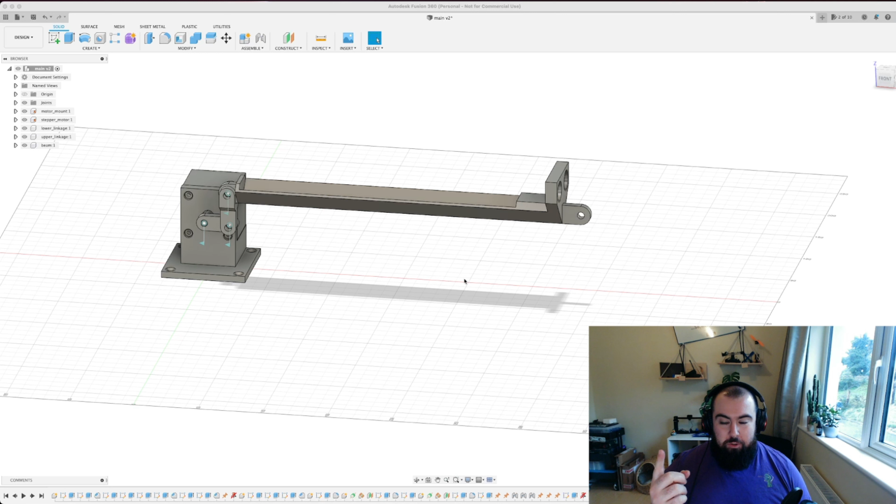I have my model almost finished here, but I have one part left to do, and it's a relatively simple part, but it has some cool little features on it, so I thought this would be a good one to show you guys live.

I might be a bit sporadic with my talking here, because as I actually think about what I'm doing, I may just be silent. If that happens, I'll cut and do editing stuff anyway, but I'll try to make sure as I make decisions and call out things, I'll talk through what I'm doing the whole time.

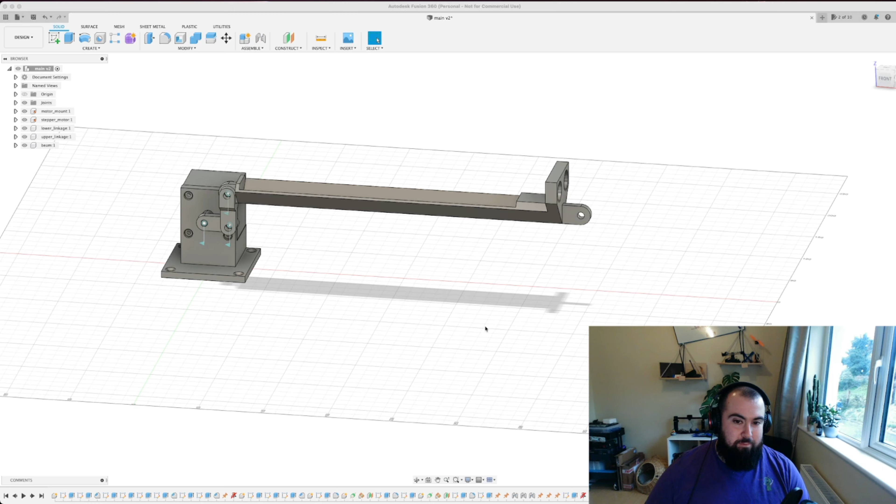Okay, so this is everything I have up to now. The last piece I have to do is the fulcrum piece, which will attach here and be secured. There'll be basically a little clevis here that this goes into, and the pin will go through here in the real life version. Then the body of it will come down and meet some solid base here, and this is the main fulcrum that the whole thing hinges around.

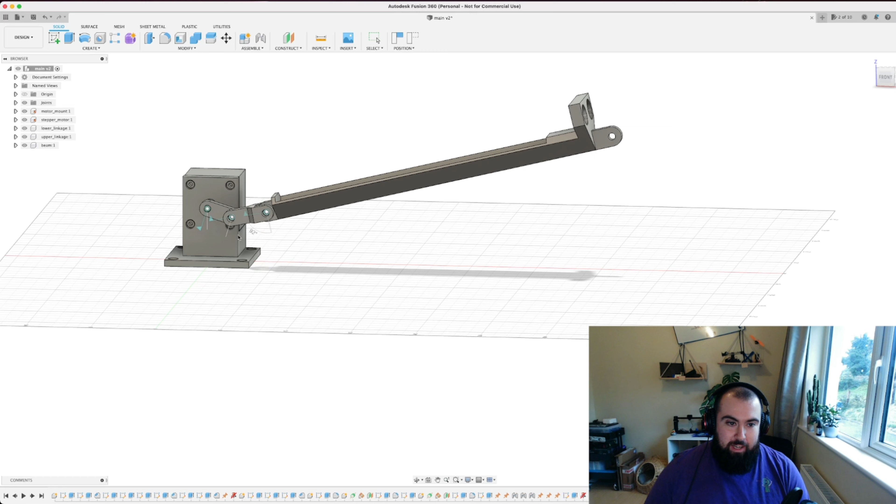So I have some of this done up already with hinges and stuff, so you can see how this will move. It's not really constrained at the moment, so it can be a bit wild and crazy to move around. But once there's a pivot here and this end is fixed, you'll be able to fully simulate all the joints moving around on it.

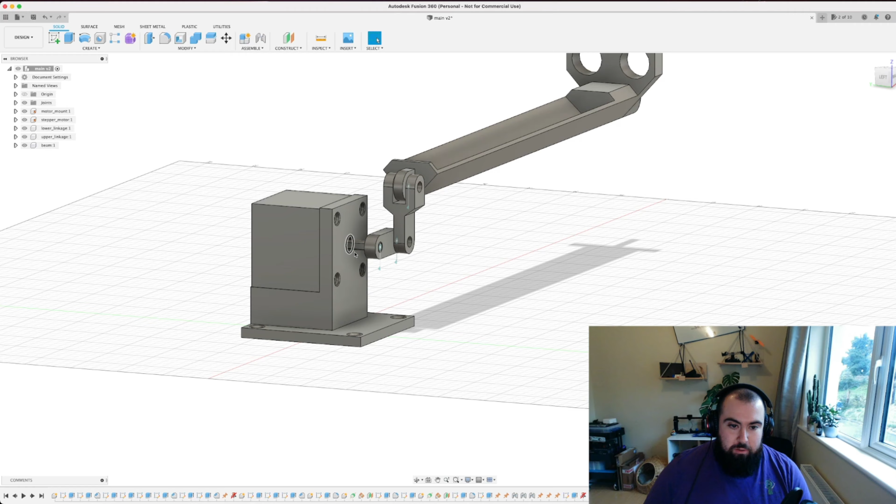Okay, so let's put that back. So the way I built this was I started with the motor mount, modeled that, then I modeled the little motor itself, which I didn't really have to do, but I did it just because the motor shaft has a little key on it, so I wanted to have that modeled in. Then I modeled this linkage, then this linkage, then the beam. So now I'm going to start from the beam and work my way down and model the fulcrum piece.

You could do this in any order really that you see fit. This is just the way I thought through it in my head, to build it up incrementally bit by bit. Might not be the most efficient way to do it, but hey, it's just the way my head worked around solving the problem.

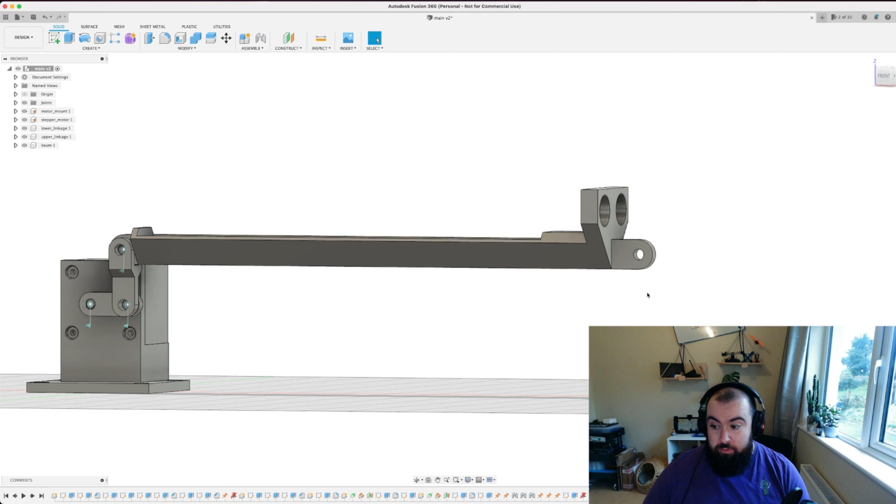Okay, so first thing we need to do is we need some references to work off of. Fusion 360 lets you do a lot of cool things around making references easily between existing parts, components, and the new component that you want. So first thing we'll do, we're going to make a new component, create component.

Ooh, where's that dialog? Oh God. Oh.

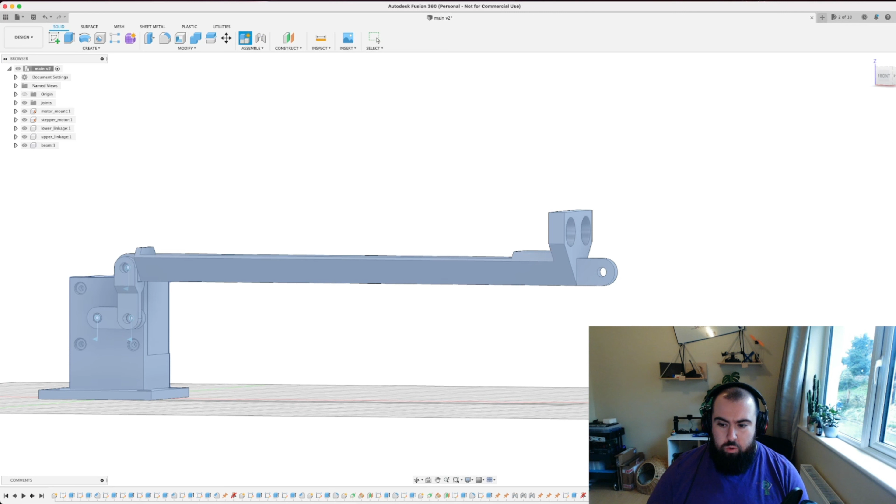Okay, I don't know what's going on there. There should have been a little dialogue that came up, but it didn't. I have no idea why. I am doing some weird screen sharing stuff here, so I don't know if that's having an impact on how things are rendering. But anyway, we'll keep moving, see what happens.

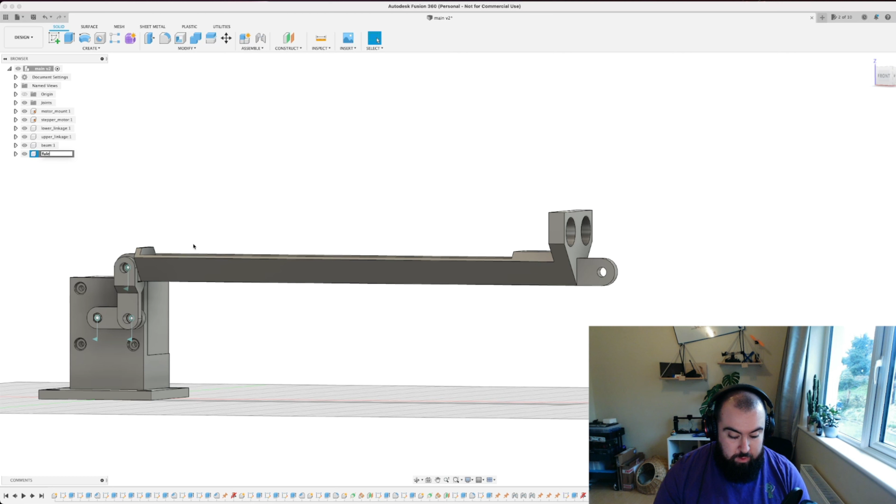I can just rename this anyway, so call it the fulcrum. Okay, so I'm going to activate that as a main component, so this all gets grayed out.

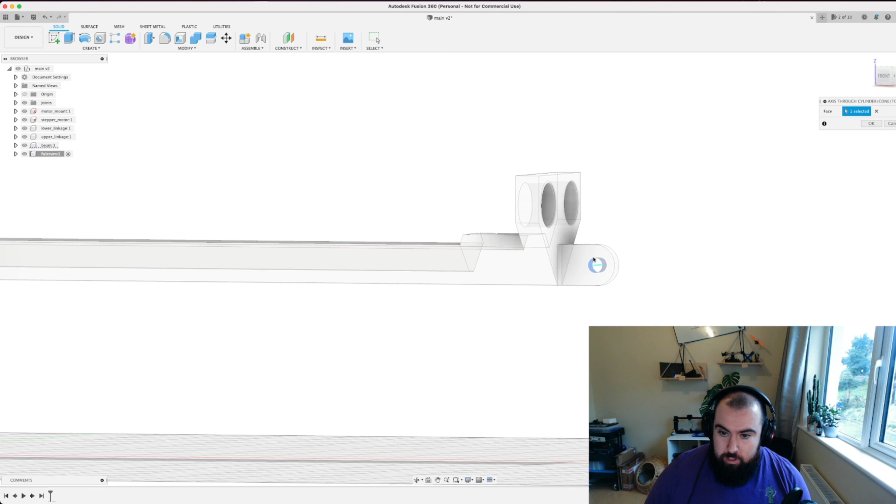Now, the first thing we need is a reference plane to work off of, so we're going to create that, and it should be pretty easy. We'll go to our construct and define an axis. The axis I want is going to be around here, so we see we have our axis created. Then I can select this axis, and now construct a plane at an angle. I'm going to say it's at a 90-degree angle, so it's vertical. Cool, that works, and we'll go with that.

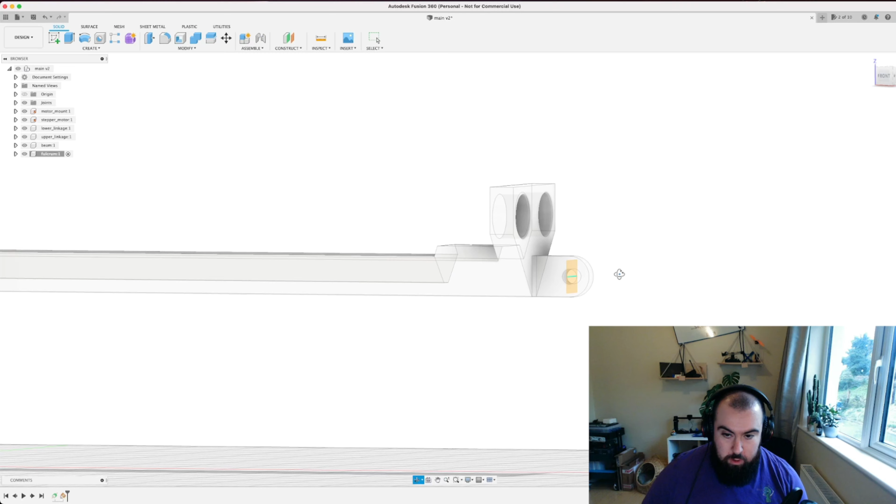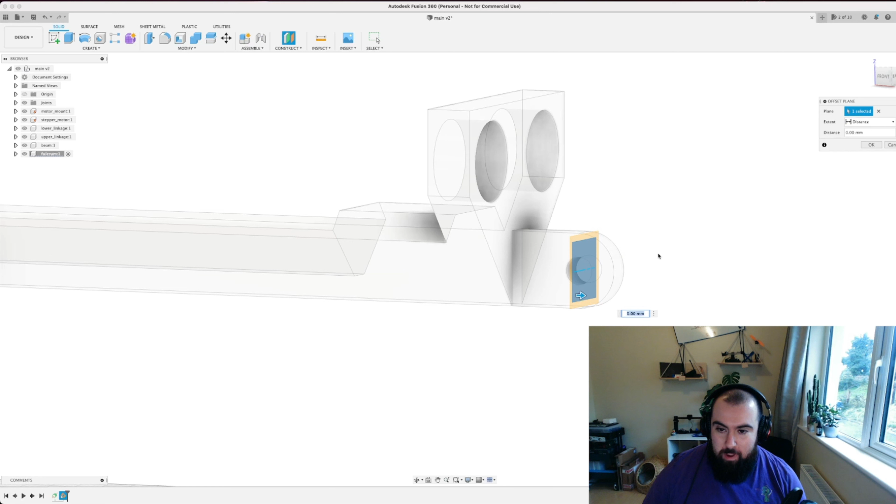Then I can move around and select this plane, and we're going to do another plane off of that one, which will be an offset plane. Effectively what I'm doing here is, because I want to make an extrusion that is basically the clevis piece coming out this way, this plane is through the very center of that axis. So if I want it centered, and I want this to be 20 mils thick, I'm going to push this plane back by minus 10 mils. So there we go, that'll start there. Hit enter. Now I can hide some of these planes which I don't really care about anymore.

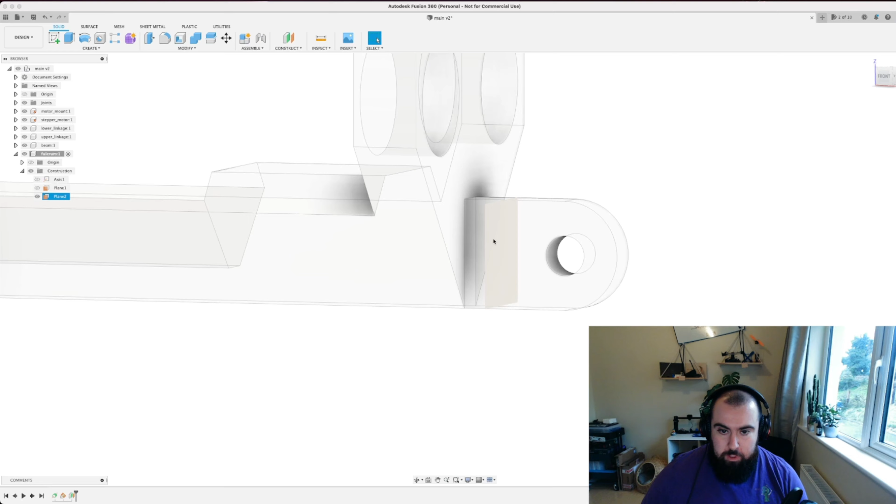So I just want this plane. Select this plane, and we're going to do a sketch on this plane. This can be a little tricky to see what's going on here because of all these other bits of geometry, but I can hide the bits that are going to mess things up. Yeah, so this is a bit easier to see now. This is just the back end of the beam we're looking at now.

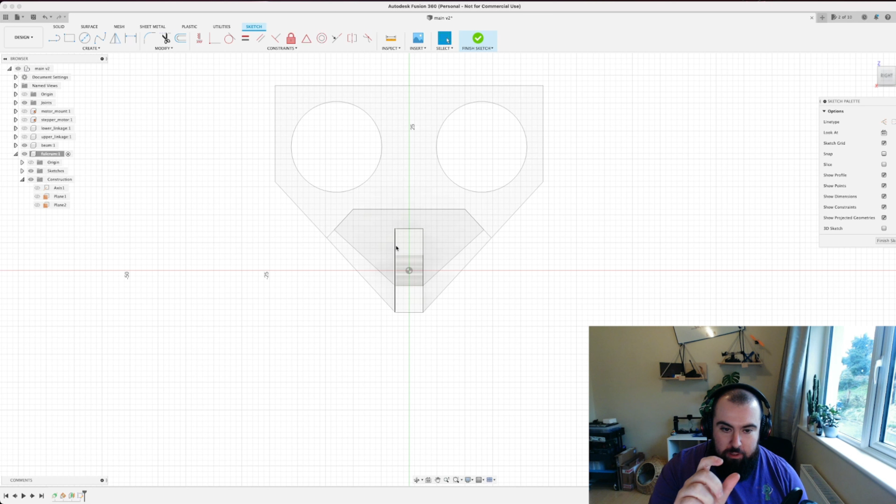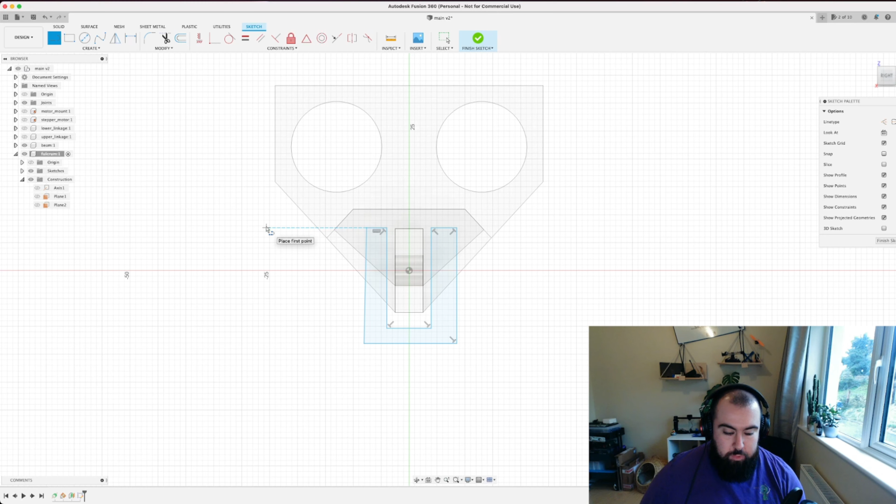And this is specifically the little part where the joint will go through that we want to make the clevis either side of. So I'm going to start off just with drawing some lines, and then I'll dimension them afterwards so they match everything up correctly. Start off with a straight line across here, come down below, across here, go up, across, and down, across, and up again.

Okay, so now we can start dimensioning this and putting in our different constraints that will help us set up our alignments. I'm going to draw some construction lines - any geometry can be made construction geometry by selecting the tool and pressing the X key on your keyboard. Now it'll get drawn as a dotted line, meaning it's for construction purposes only, so you can't select it when doing your extrusions later. You won't be able to select that geometry. It just makes it a bit easier to see what's going on. Okay, what else? Okay, yeah, another.

Make this a vertical line, and then, yeah, I have this origin here, so I think I can - is that the origin? No, it's not. That's that axis. Okay.

So what I need to do is start making dimensions around this other piece here. Now this is where things aren't maybe ideal - ideally you should do this all with references between other things. I'm not doing that, I'm being kind of lazy and just throwing in dimensions willy-nilly, kind of without references to other models and stuff. Ideally what you're supposed to do is make reference planes for everything and make sure the dimensions match up. I'm just clicking on any random points and trying to match it all up, which does work, but you can get yourself into trouble with it. This is a sufficiently simple part that I'm not too worried about that. Anyway, what was I doing?

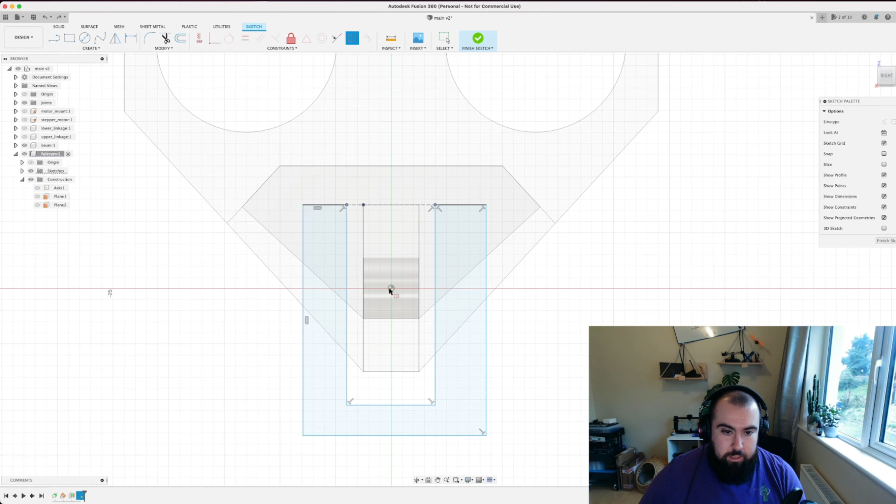Okay, yeah, so let's get some symmetry here. Select 2 points, I'm saying they're symmetrical about - oh damn it, I can't select the origin there, damn it. Never mind that, we'll just do it with a dimension instead.

What way would we do this? So the distance between these two, I believe I want it to be 7, because I think this piece is 5 mils and I want 1 mil either side.

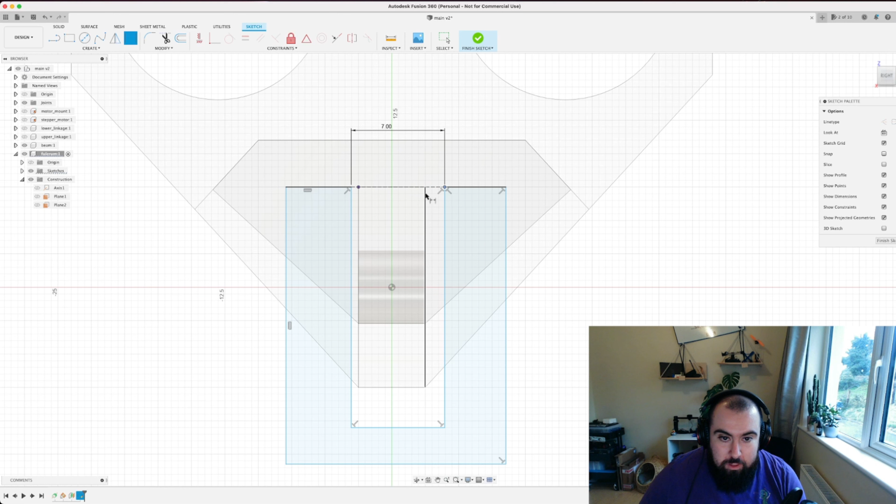And now obviously I need this from here to there. I want it to be 1 millimeter. There we go.

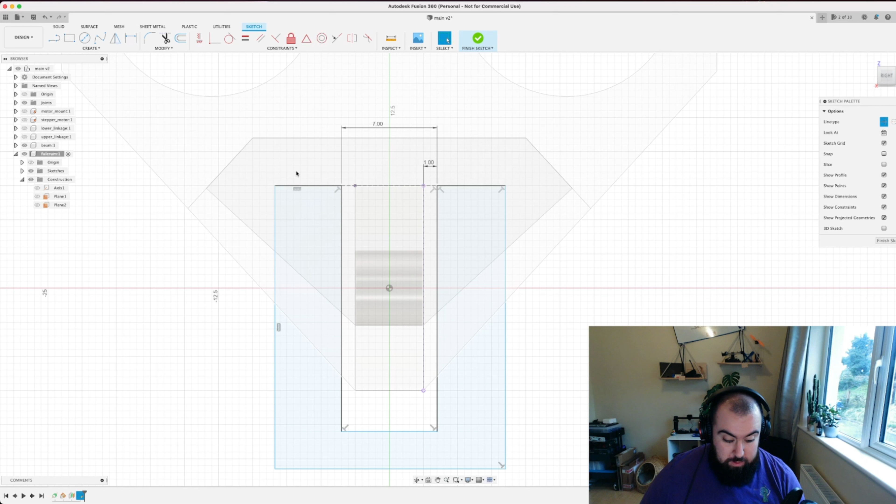Now the thickness of this is supposed to be 5 mils, I think. Or actually, will it be 5 mils? No, it won't be. I'm not going to define it that way. I want to define the overall thickness of it, which is going to be 20 mils. So select the two outside points, make that 20 mils.

Okay, yeah, but that's just added onto that side, so I need to make them the same. I'm going to make a midpoint like that. Yep, damn it. That was supposed to be a construction line, and I made it not a construction line. All right, try again. There we go.

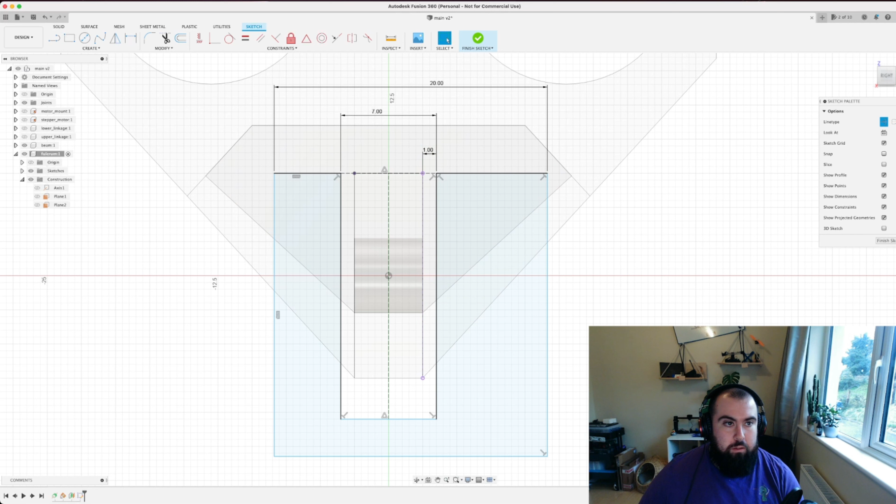Okay, so now I'm going to use our symmetry tool and say this point and that point are symmetric about that line. There we go. Okay, what else have I got in here?

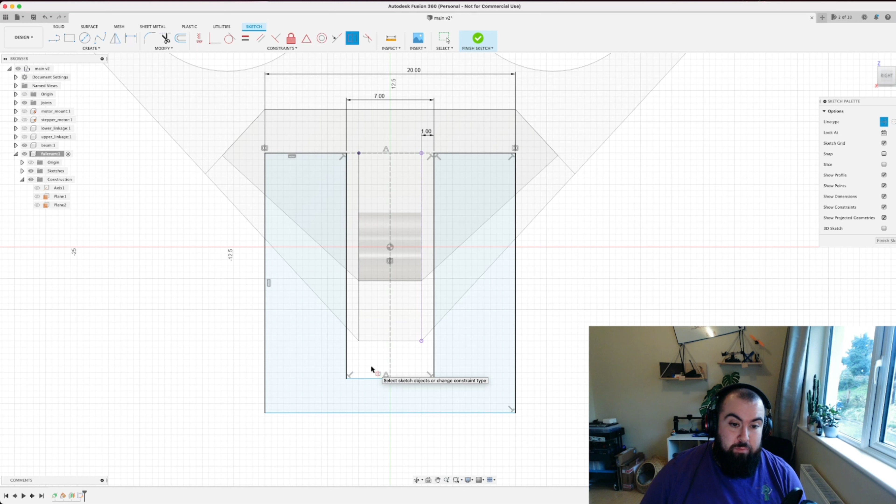So yeah, a lot of the rest of these dimensions are kind of arbitrary. The depth of this clevis doesn't matter a huge amount. Obviously, the deeper that clevis is, the more the arm will be able to swing down the way. It doesn't need to swing through a huge angle. You can see here, this is the bottom of it.

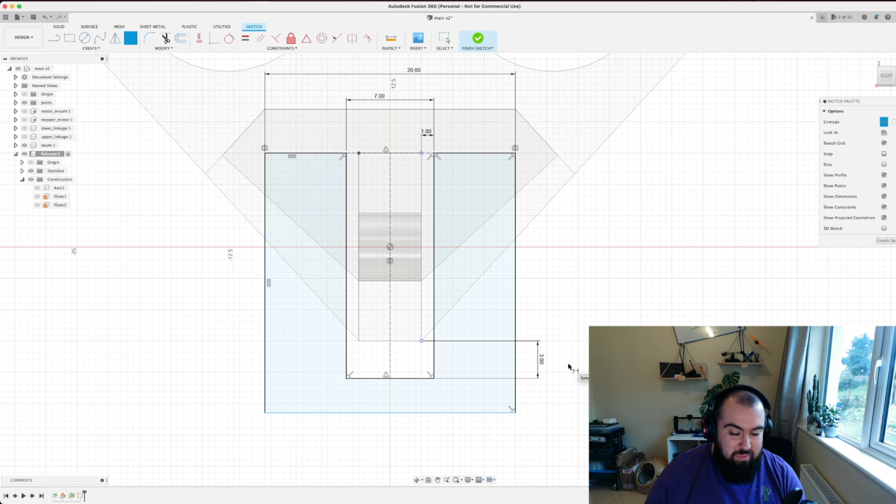So I'm just going to see what that dimension is. And often a trick that I do for this sort of stuff is I just kind of look at, what is it roughly? So that says it's 3.07 mils. So let's just make it 3 mils. Yeah, we'll see what happens. I can test it when we have the piece made, see how it moves around the place, and yeah, we'll see what happens then, see if we have enough clearance and stuff.

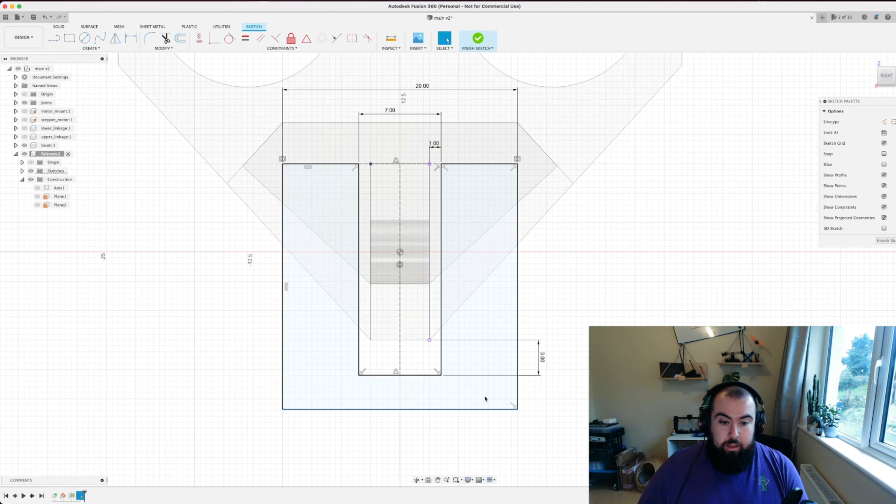So what else have we got? Okay, yeah, so the only other bit that's unconstrained now is this. That can be moved up and down. Now, I suppose, yeah, actually, I can do this.

So at this point now, I can pretty much make this all the way down nearly to the ground plane, except that I want to have a separate pad on the very bottom of it, which I want to be 5 mils thick because that matches the other one. So I actually just need to line it up, and I can just drag this down more or less to exactly the same.

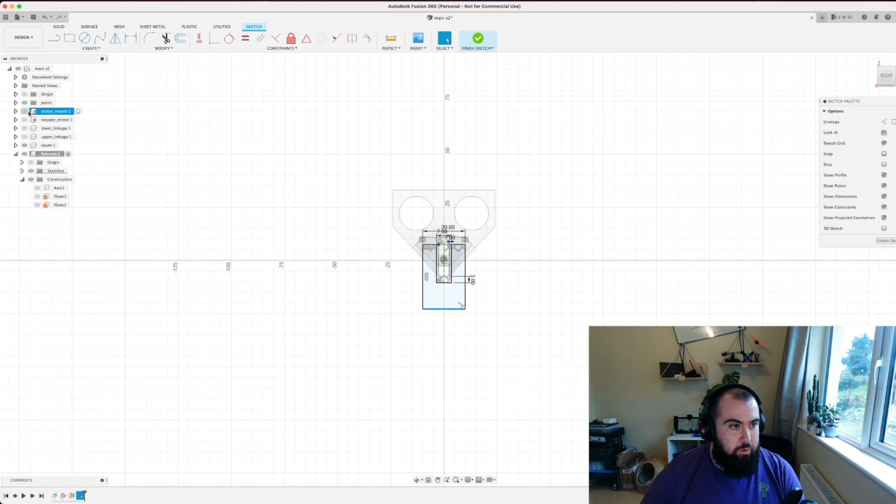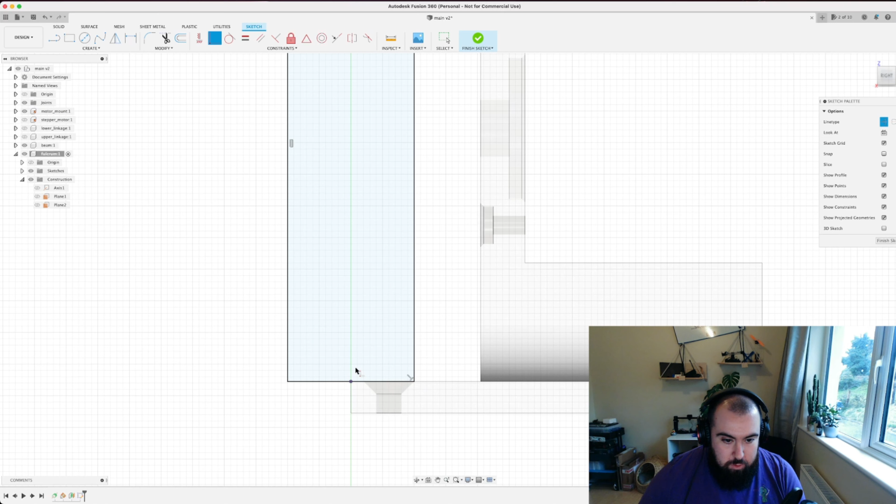So what I'm going to do is add back in the motor mount piece. There we go. So effectively what I'm going to do is drag this line down until it matches with that. There you go. That's pretty much it, but I'll do that properly with a constraint. So I can select that point and say that it's going to be coincident with that line. There we go.

So that's, yeah, that's most of this done. It's pretty much the entire part done, actually. The bulk of all the referential geometry that's really important for how this all hangs together is all done now, completely with this.

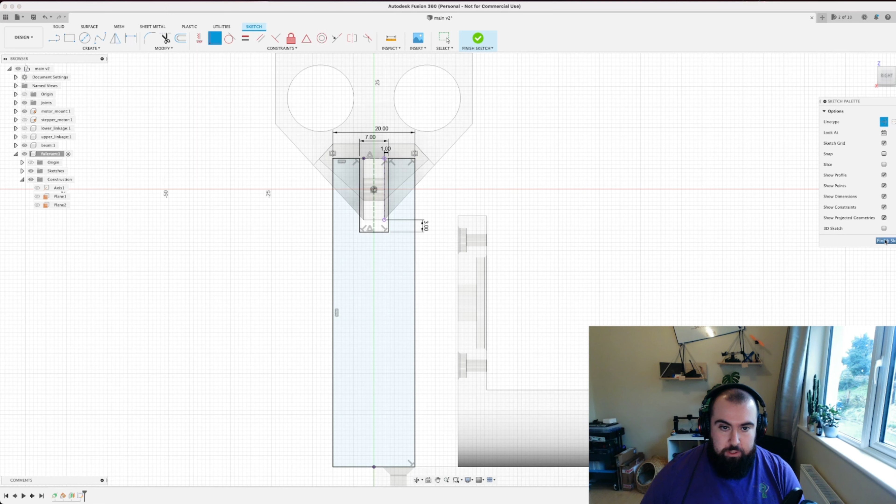Okay, so that sketch is fully constrained, so I can exit out of that now. And you see here, the only shape that I can select is what was bounded by all of the solid lines, and I can't select anything that was bounded by these dotted lines. So I'm going to select this, and I'm going to go up here to our extrusion tool, and we're going to make an extrusion.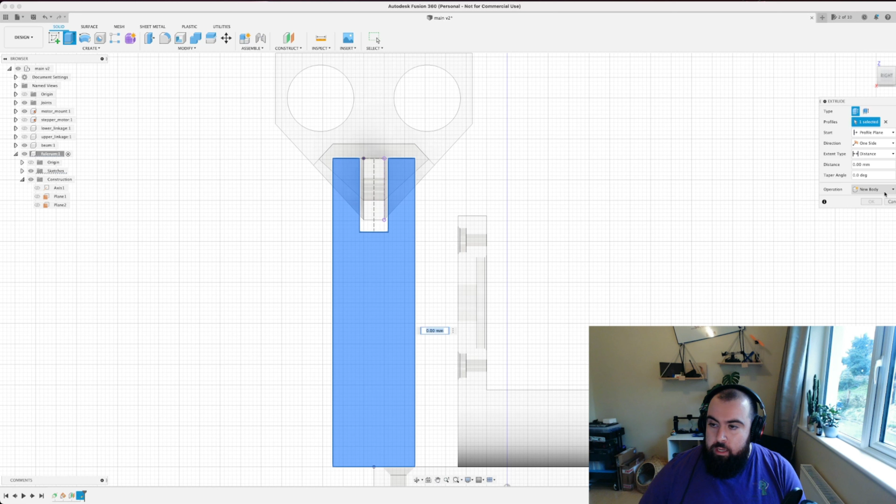This is going to be a new body, and I want it to be 20 mils thick, so I put in 20 mils. Now, if I rotate around, you can see that that is what it's going to look like when it gets extruded, which is lovely. So looking at it there, it almost doesn't need to be 20 mils though.

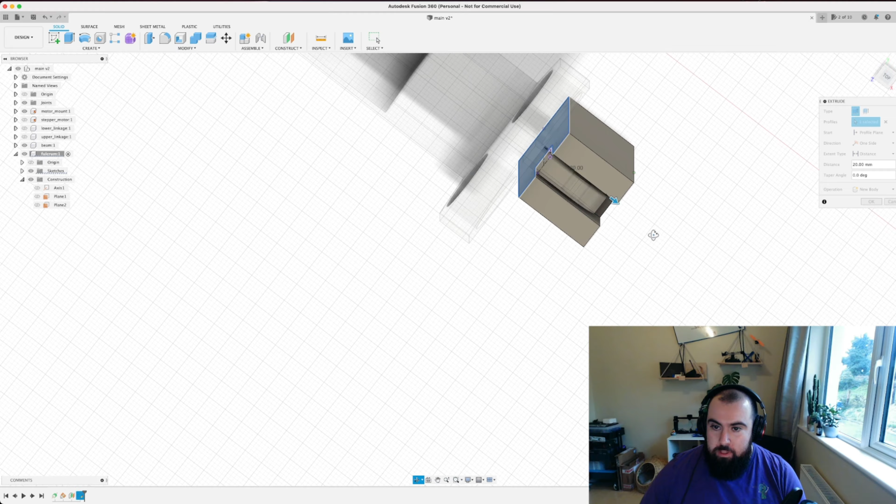There's a lot of clearance there, so I might take that, let's reduce that. Okay, or do I want it to stay 20 mils?

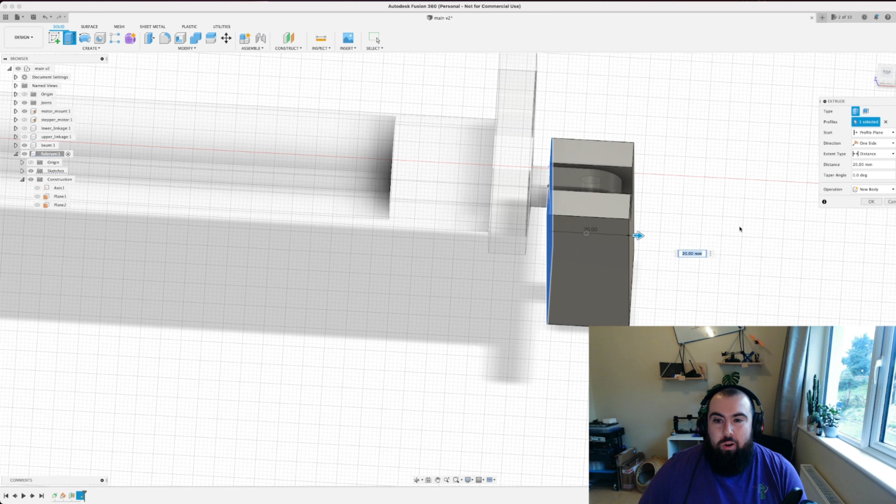This is always the doubt about debating the thicknesses of things. I always wonder, if I take a few mils off, will it just be a little bit less strong than it was? Probably won't be. Let's just leave it as 20 mils for now. There you go, wonderful.

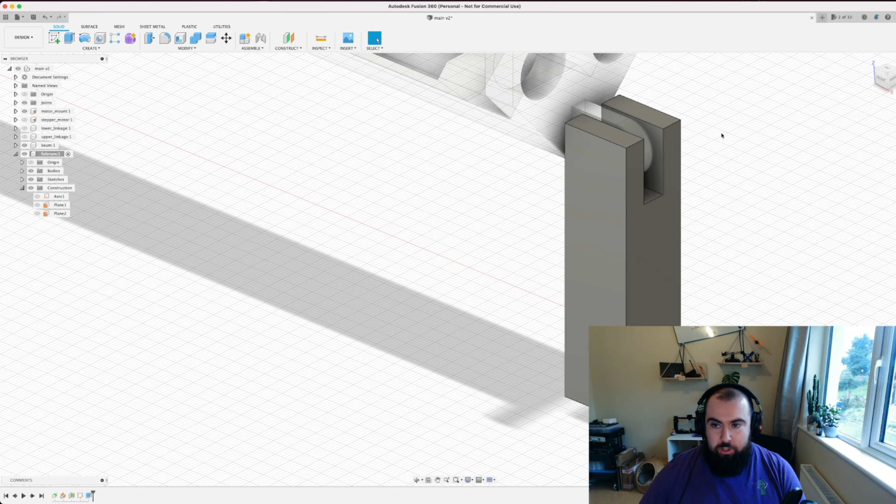Next piece I want to do is the through hole, which is what it can pivot around. Then I can add some fillets to the top here, and I'm going to add a little base to it. I'm also going to add some ribs off the sides for support, but I'll show you once the ribs are done, because it'll be easier to see. And once the through hole is done, you'll be able to see I can freeze all the parts properly and get the moving geometry back up and running. So let's do that.

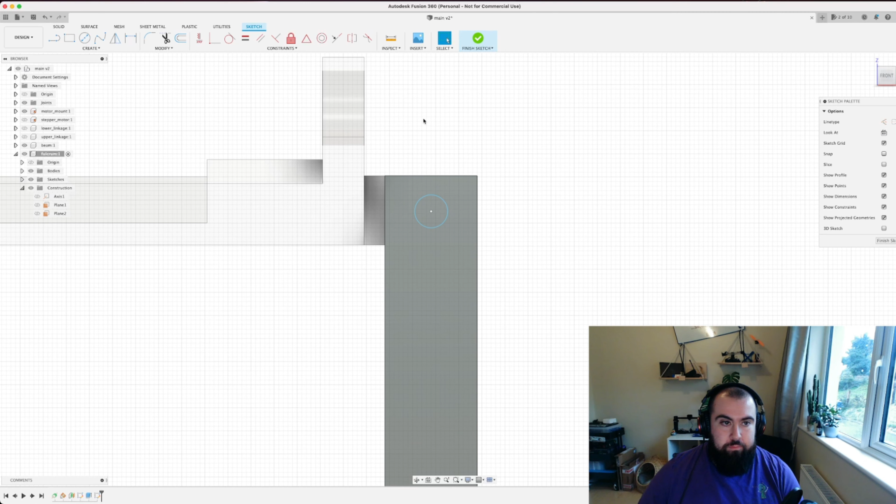So we're going to do a sketch on this face, and pretty much all we're going to do is draw a circle. We just have to correctly position that circle, so go like this. It's just 2 dimensions, 3 really. So from there to there, that should be 7.5, I think. Is that right? Yeah, 7.5. And then from here to here should be 10 millimeters.

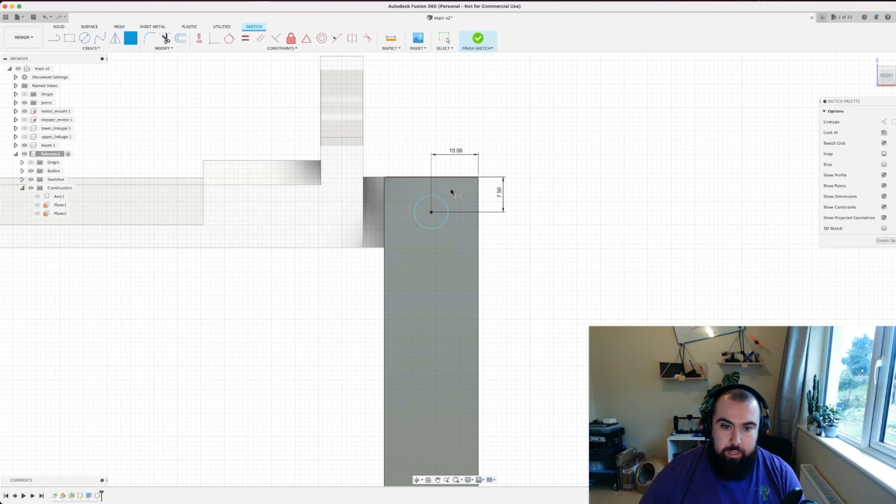Now the diameter of that should be 5.5. I just know that's the diameter I've been making all the through holes, so that it's nominally sized to fit an M5 bolt through it with a small bit of slop, so things can move around, and also taking into account the 3D printing tolerances.

The 7.5 is, and you can see that nicely there, that curve that's highlighted is the backside of the little slot it's going into. So I know that's lined up nicely because it's centered, made with a radius of 7.5 all around. And then 10 mils is the center of this because it's 20 mils wide. So that's all simple. Now let's cut our hole in it.

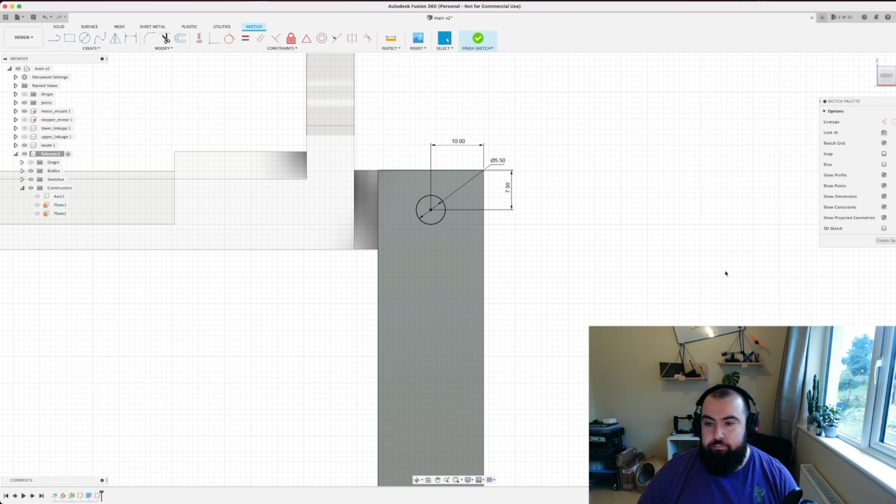There's a lot of different ways you can do holes in Fusion 360. You can do them using the holes tool here, but I'm not going to do that because it's a kind of specific way to use it. I'm going to use the extrusion tool instead. I'm not going to get into why there's a difference in how you'd use them.

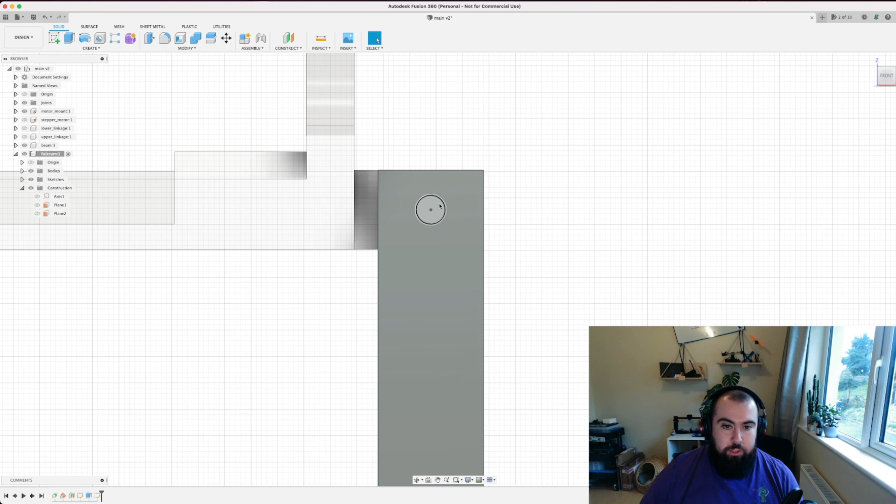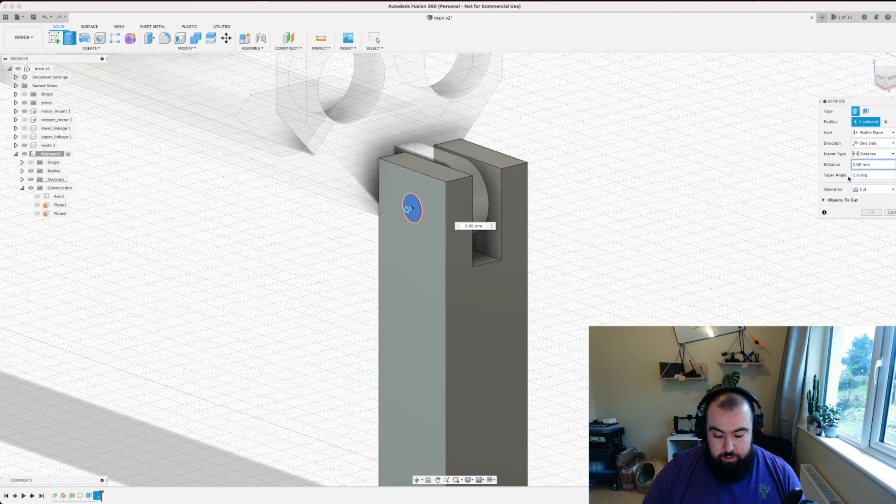So we'll select this sketch geometry, go to our extrusion, and select that it's going to be an extruded cut. Now if we move around, you can see the direction of the cut is going to come that way because it's based on the planar face. So we're going to make it go in the negative direction. I think it's 20 mils, so I want to go minus 20, so it's going to go back the way.

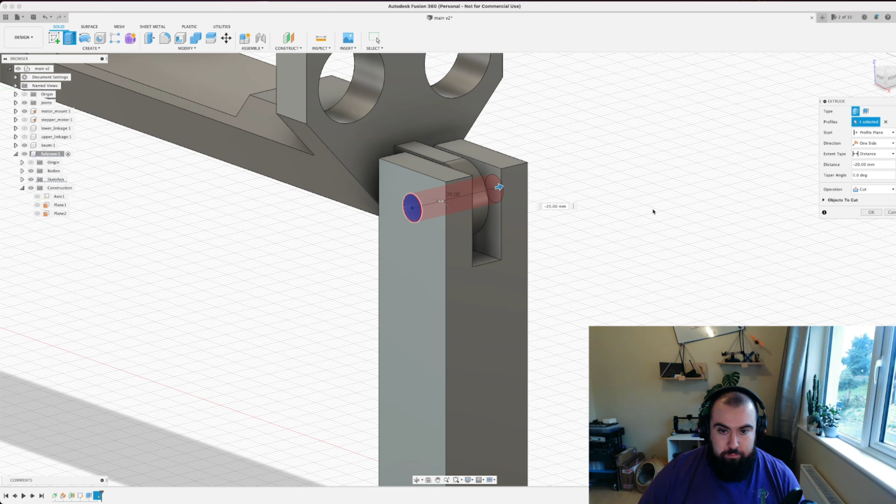The objects to cut, it's just cutting through the fulcrum object. It highlights this object for you, I think, because the geometry goes through it, but it's not actually going to cut it. And if it would intersect with other objects, you can deselect them here to make sure you don't cut holes into random objects. That should put a hole straight through. Yep, so do that. There we go.

Next, let's add some fillets up here just to make it look a bit pretty. So I select those 4 corners, go up to modify here to the fillet tool, and because it's 20 mils, I can do 10 mil fillets. There we just get a nice rounded top on it. Click OK, and that's done.

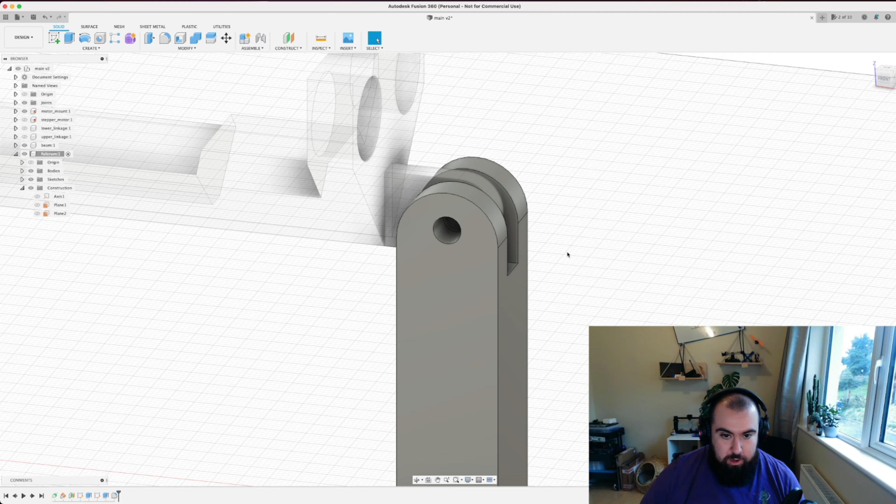With that done, we can actually simulate the entire movement of the rig by creating a new joint in here. So what I do is click on the joint tab here in the assembly, and it highlights all of the parts. Now I have to go in and find my geometries that I want to join.

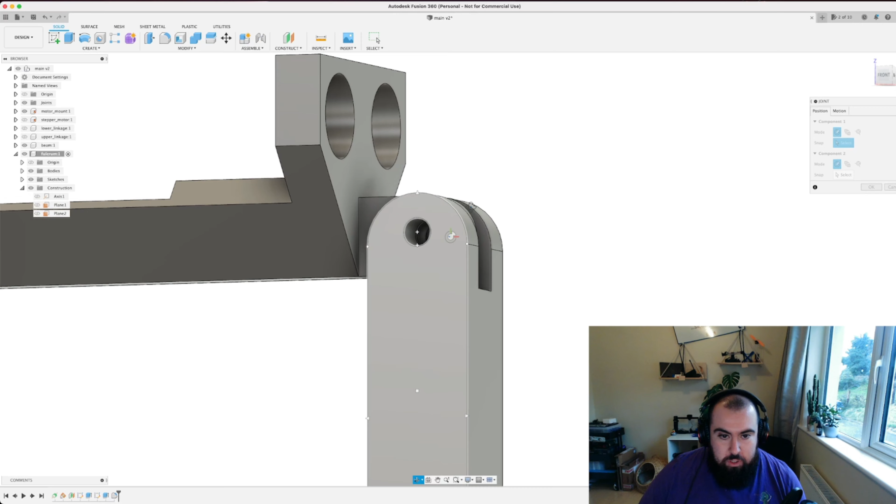So I'm going to select these 2 circles, there and there. Yep, and there you go, you can see where it's put it in. I'm going to stick in the offset because you can see that's basically putting them hard up against each other, but I actually want a slight offset. So I think this is going to be -1 in the Z direction.

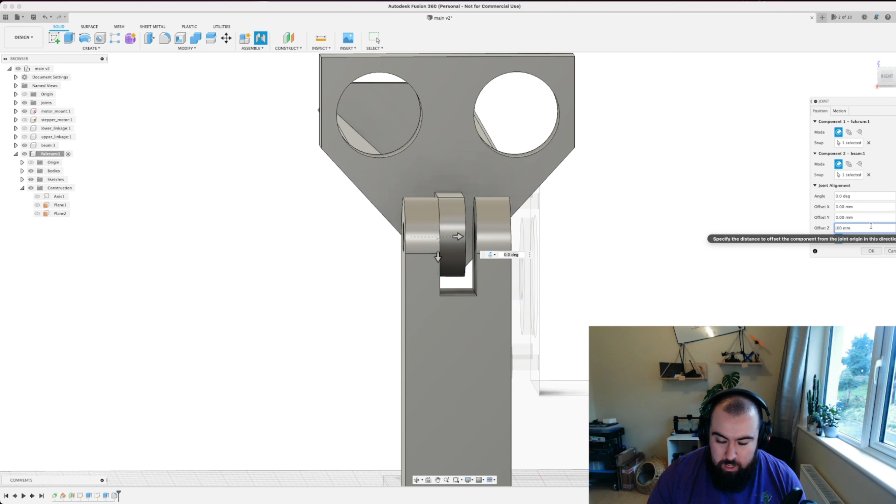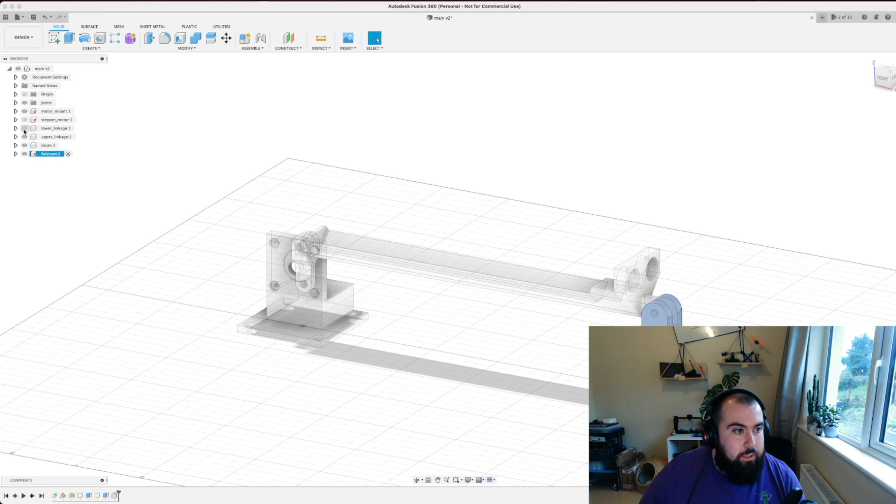There we go, and there we have it. So now to simulate this, make sure it moves in all the correct ways. What you can do is I'm going to select the fulcrum piece. I'm going to click ground, which means that it's a solid piece that won't move around. I'll expose all these bits, and I'll select this so you can see everything.

And now effectively I've said the motor mount and the fulcrum are all fixed in place so they can't move, but my other ones, my lower linkage, my upper linkage, and the beam are all free to move around the joints that I've created. Each of these joints are basically a free rotation joint that I've set up with concentric circles, so they're basically just like pivot points around pins.

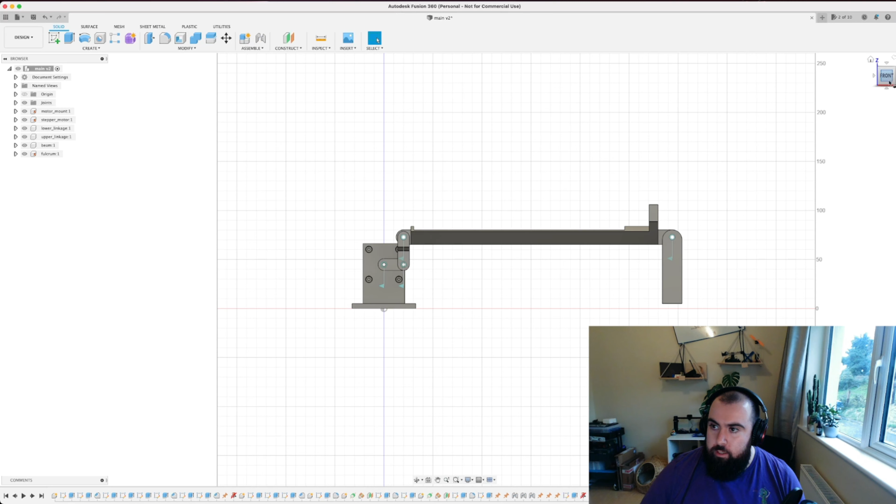So if we set up a nice front view, let's see what happens. And, oh, what did I do there? I did something I didn't like there. Oh, okay. So I set up a front view, and now there we go. That's how our beam will move now.

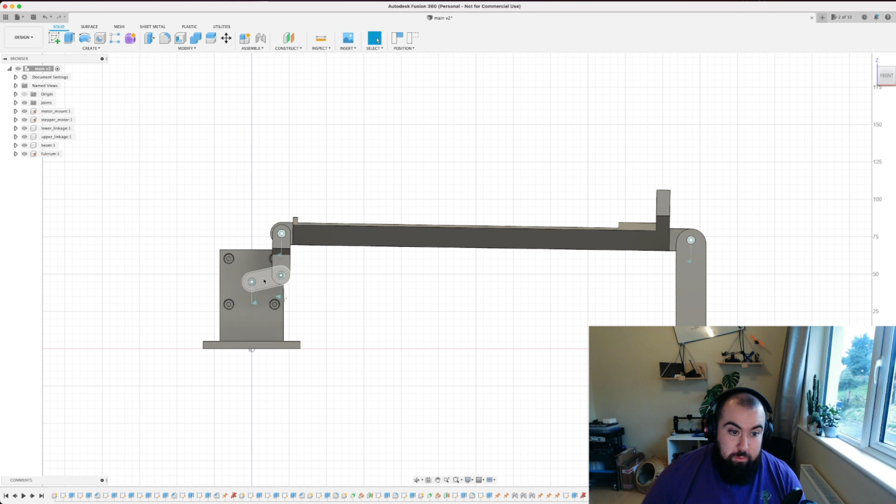Nice. So as the motor shaft rotates, the shaft will be locked onto this pivot point, and then that linkage pushes the beam up, and then also can bring the beam down like that. And there's the angle that we move through. And so you can kind of zoom in on your points, which is cool. So you can see all your clearances and see where things start to touch each other.

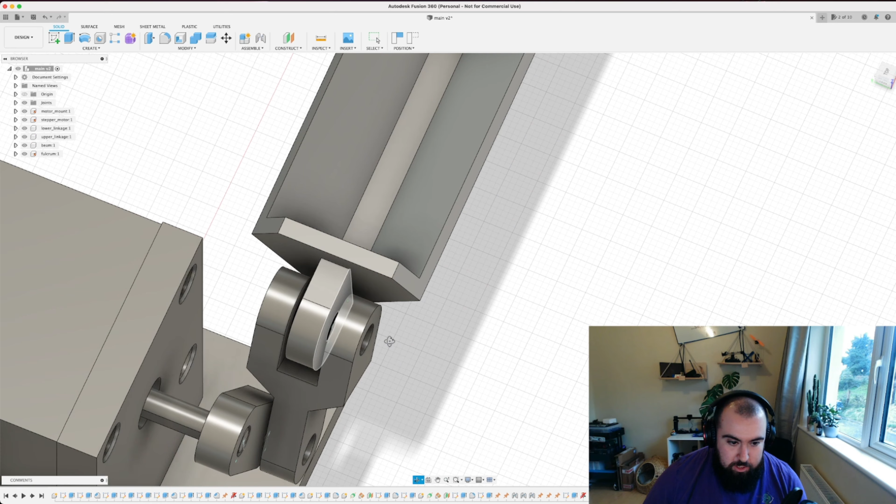So for here, I can push it and see if we get any collisions between any of these parts, which I'm pretty happy there we don't, which is nice. Oh yeah, we don't actually get any at all. That is quite nice. Well done me. I thought I would get a collision somewhere there, but it seems I won't, which is cool.

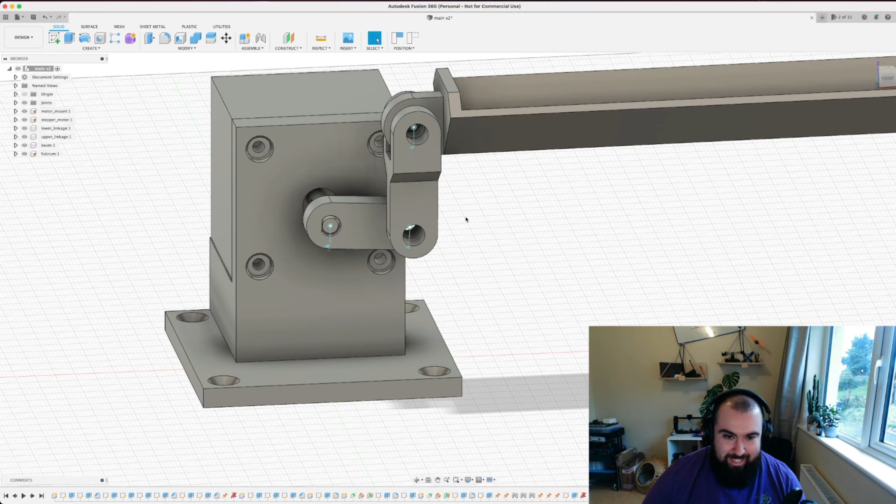Nice. Okay, well, it's not supposed to move that way. Come on, move back up. There we go. And yeah, so then that will move up, move down. There's nothing that will get in the way there. Yep, doesn't move it anywhere it's not supposed to.

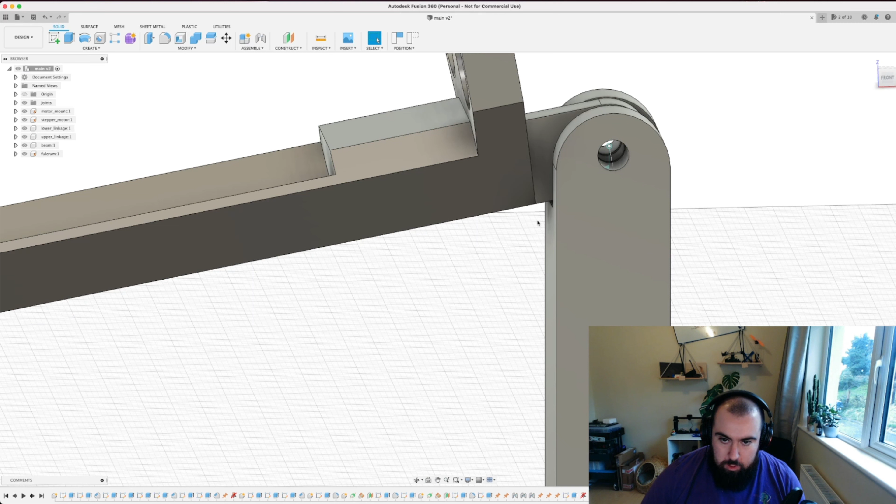And then on the back side over here, which I was a little bit concerned about, zoom in a bit here, you can see, well, it will bottom out eventually there, but hopefully it will not end up in that position anyway, so it shouldn't really be too much of an issue. Whoa. Yeah, so that's probably about where that bottom position will end up. It's not hitting there, and then the same when I go up, it doesn't hit either. So yeah, nice, that's it.

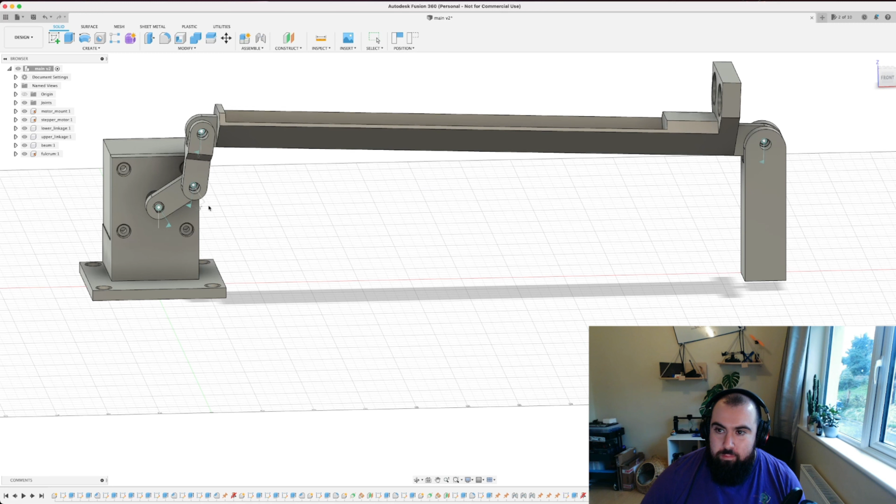I'm gonna kind of leave it there. There is a little bit more to do on this part, but it's just basically putting a flat base on this and then also sticking some ribs off the side of it. It's not going to be hugely interesting. I think this is probably more interesting to have seen how I put that together and how I use this tool to check all my clearances.

This was done based off a prototype, so I already had some dimensions and some physical pieces here that I could take measurements off of. So it's not a full from scratch build of this, but it's still really good to be able to set this up quickly to validate that all my joints do work the way I want them to.

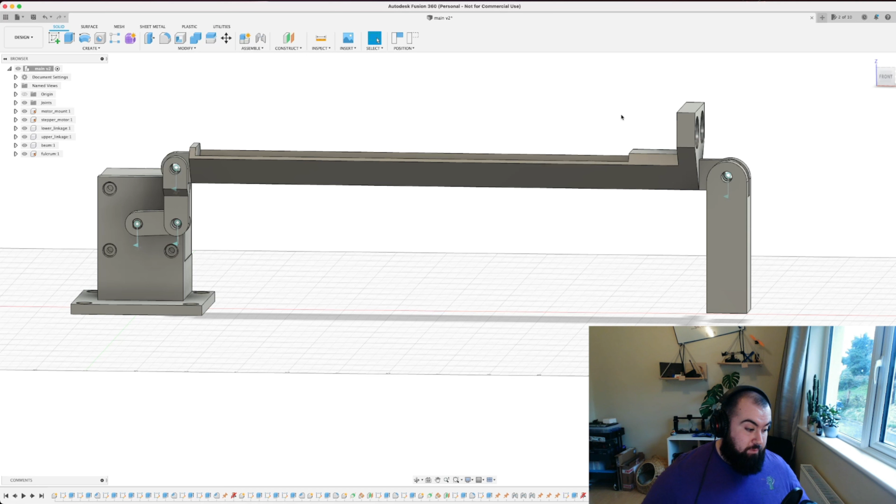Quick note as well, this beam is also about 5 or 6 centimeters longer, the ball's travel path, which is really good. Actually I think it's more than that. What is it? So yeah, it's actually 7 centimeters longer of the travel path, so it should be a little bit more interesting to work with, and it should actually be a little bit easier to get it to balance as well. You have more room to move, and it can move through a better angle than the last one did, so that's good.

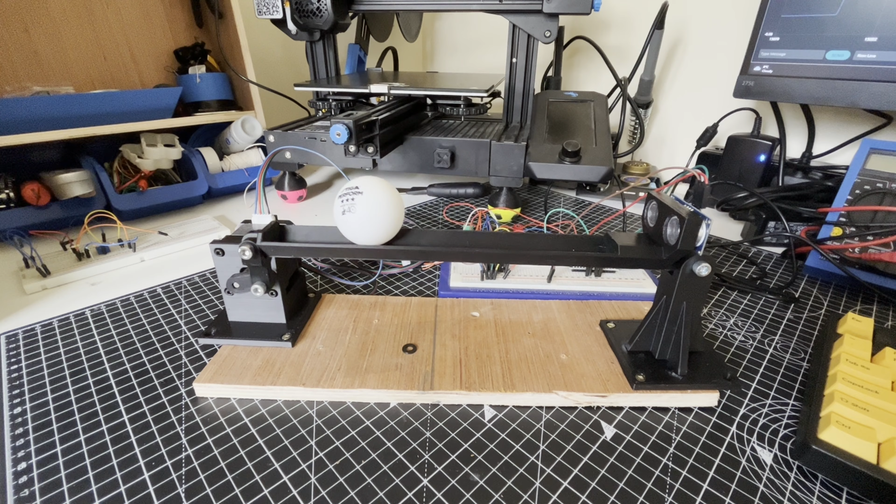Okay, we're back, and I've got a rudimentary tuning on the rig, and as you can see, it's moving around, trying to do some things, but it is actually balancing the ball and not doing a terribly bad job at it. It's a little slow, but it does get there for a very first pass kind of rudimentary tuning on the PID.

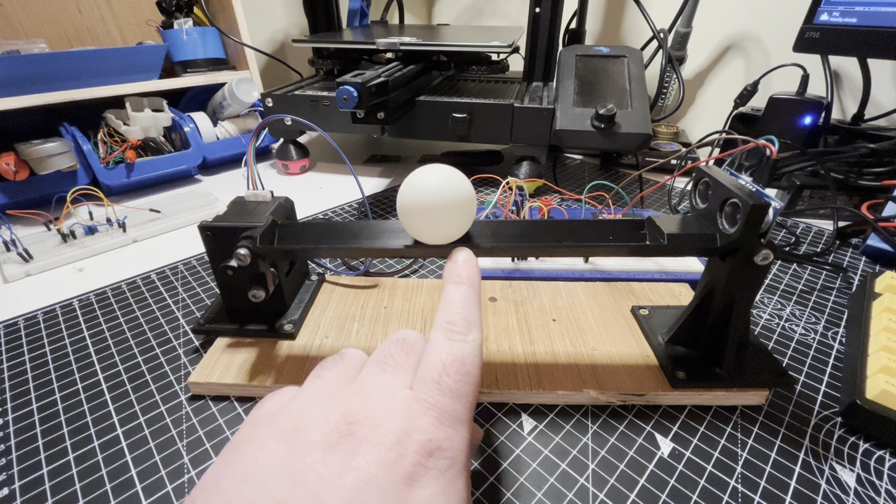There we go, sits back into the center again, so that's reasonably good. I don't think it's amazing, but it does work. There's a little bit of noise that I'm noticing when it's sitting at its set point, it sort of wants to jitter a little bit. It's also, when it gets very close to the set point, sometimes it's very close but not quite there, and it'll sort of vibrate a little bit to try and move it, and then it can introduce another kind of oscillation into it, which will then kick off into bigger oscillations until it dampens back down again.

But if I give it a flick, it detects that movement and it starts trying to counteract it. That's what I meant there about the little got stuck, and then it's going to come back. Oh, very close there, very close. See now, yeah, it's kind of stuck there, but yeah, it's kicked itself off again. And let's see, and there we go, back to the set point.

So that's working pretty well, and there's a little drift there. Also, I haven't got this set perfectly level, so it's not balanced. The idea is that it obviously needs to balance it, but also the beam needs to be level as well, so that if it's just ever so slightly off, gravity will overcome friction and it'll start rolling again, which obviously we don't want. So it's not perfect, but it does more or less do the job. I'm confident that it works.

And with some extra tuning and some more messing around, I should be able to make this even better. So there we go, that's sitting there doing the exact thing that it's meant to be doing, and it's quite quiet as well, so that's nice.

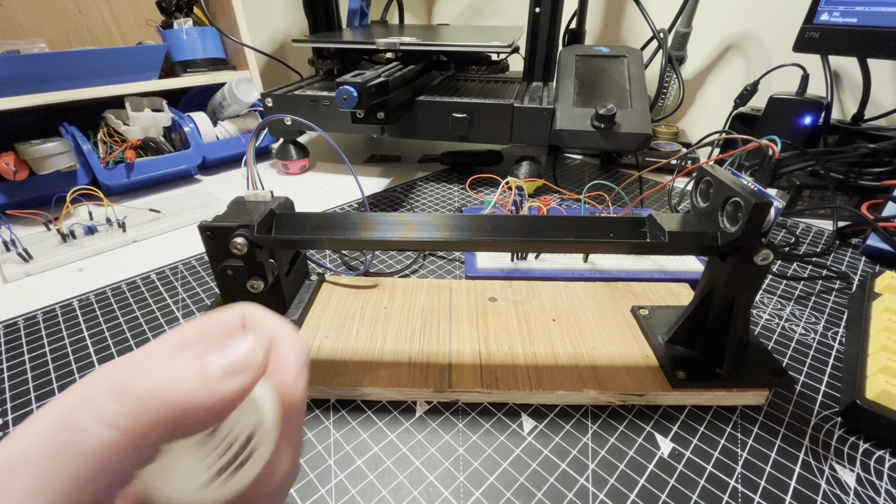So the next steps, I'm not entirely certain what the next steps are going to be on this. I'm going to unplug this just because of the noise. Next steps, there's a lot to do. What I will probably do is I'll probably spend some time tuning up on this a little bit better. I might tweak the code a little bit to see if I can improve how it performs, and then I might go and redesign the electronics a bit.

There's also, I want to make this a little bit more configurable. At the moment the motor is running in 32 step mode, I'm basically maxed out on speed, so I want to be able to make it configurable so that within the code you can change the amount of microstepping and stuff like that, and mess with the speed parameters a bit so that you can maybe tune this up differently yourself. So I'm going to play around with that, make the code and basically the wiring support all that, and there's a couple of other little tweaks that I want to make.

The next big thing then, I think what I want to do after that is I might design a PCB for this. I haven't designed a PCB before, not for like 10 years, so I might take a stab, design the PCB, and see if I can get that made as well. That'll be kind of a cool thing to have for this. And of course I'd make those plans available as part of the kit, and then if a fully manufactured kit would come with that PCB for it.